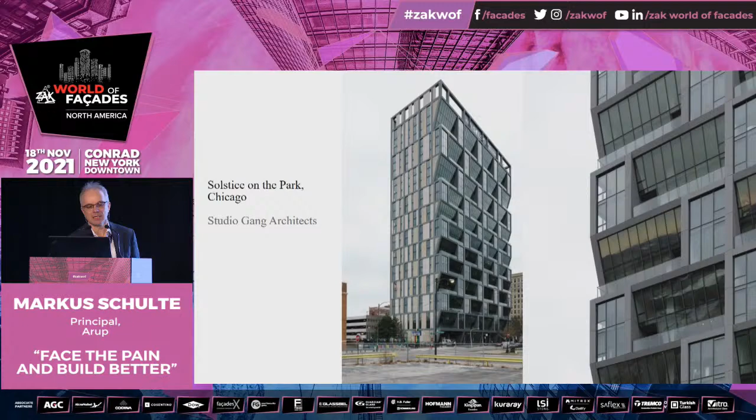When I came into this country, the project that was really important for me is this one here. And just to avoid any misunderstandings, it's obviously not an Arup project. As Attila knows, I studied at Leibniz University in Hanover, and I'm kind of a child and student of the School of German Lightweight Structural Engineers.

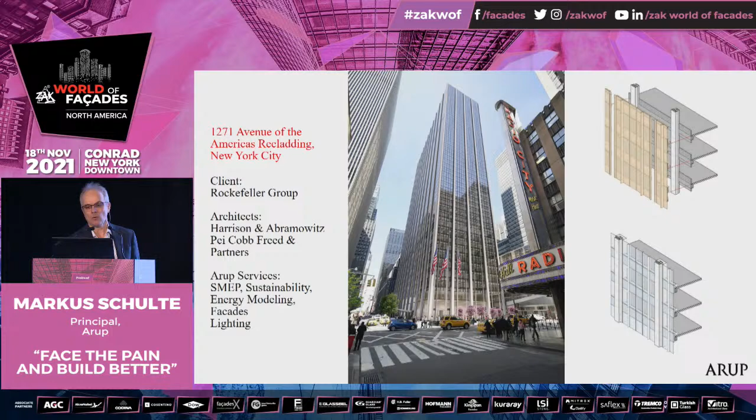We all worked on the project. We, Arup, provided a package of services. If one looks at the building, it's to some extent a celebration of efficiency.

It does not have the typical 30-foot column bay for an office building, and it's fairly narrow. In elevation, you see a very narrow vision field and a large spandrel panel. On the exterior, there are uninsulated risers going up and down the building. Looking into the spaces inside, this narrow vision field leads to very limited daylight penetration.

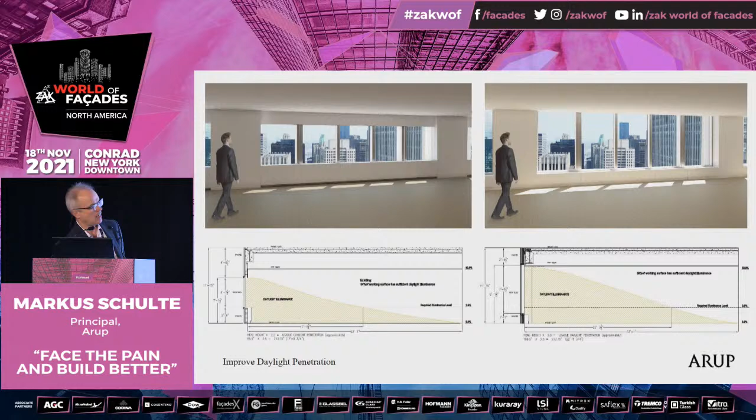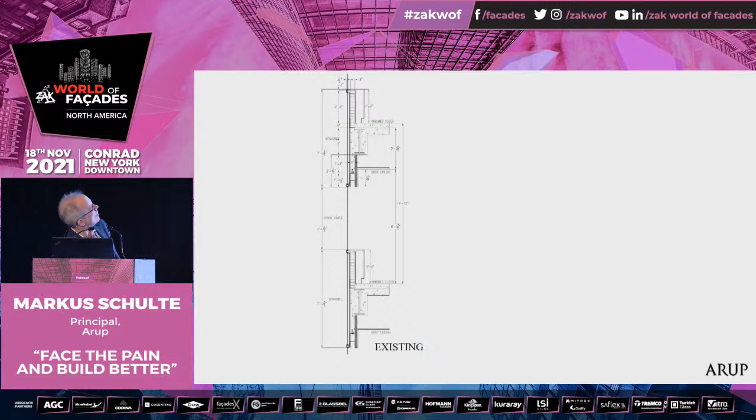So one goal of the new design is to improve daylight penetration into the building. If one wrestles with a building of this typology, looking at the existing condition, you recognize there is no insulation. There's a quarter-inch piece of glass for the vision area, and a quarter-inch piece of glass in the opacified spandrel areas. No insulation whatsoever.

So if one wants to improve it, what one needs to do is push out the building envelope, the exterior face of the glass, in this case a little bit more than 6 inches. So now we have an improved vision area, and an insulated spandrel area.

This pushing out of the facade triggers a zoning review, because the gross square footage on the lot increases, counted from the face of the facade. And one is only allowed to push the facade out and add this square footage to the lot if you meet certain specific thermal performance requirements.

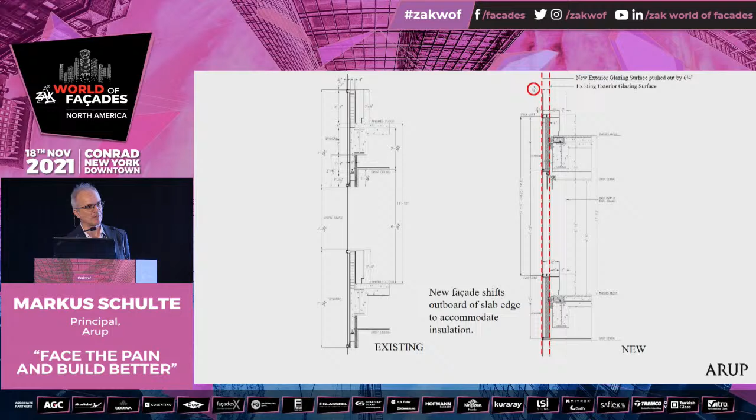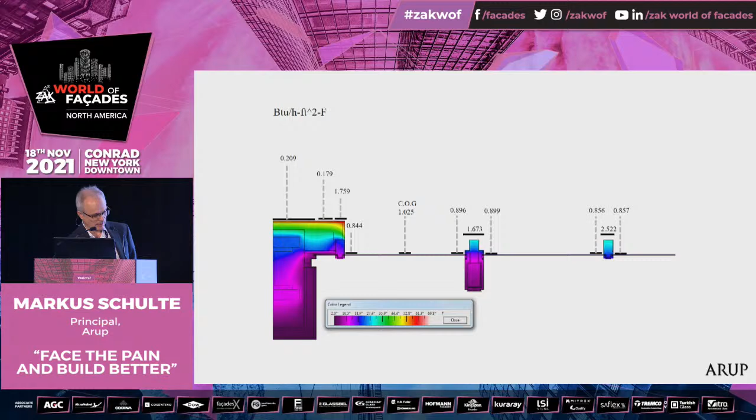To prove that we meet the thermal performance requirements stipulated by the zoning regulations, we first calculate the performance of the existing facade with a program called Therm—that's what we nerds do—and then we tabulate it. This is an interesting summary of the important thermal performance criteria on this building.

It's not only U value that is important—solar heat gain and air infiltration are equally important. In our current code discussions, with ICC's equation 4-2 being used as a backstop calculator, the solar heat gain and leakage criteria are completely left out. So there's a fetishization of U value happening right now, which I'm not necessarily a friend of, as you can gather from me talking.

The U factor improvement required per zoning regulation was 63%. We were only able to achieve 42%. But if you look at the other items, solar heat gain and air leakage, we obviously improved the performance of the building significantly.

So at the time, we did a whole building energy model. What you can see is that thermal performance improvement in U value, solar heat gain, and leakage is not linearly proportional to energy savings. The way we got this project approved is that, combining and looking at all the different items, we proved our facade is performing much better compared to if one would improve the baseline alone.

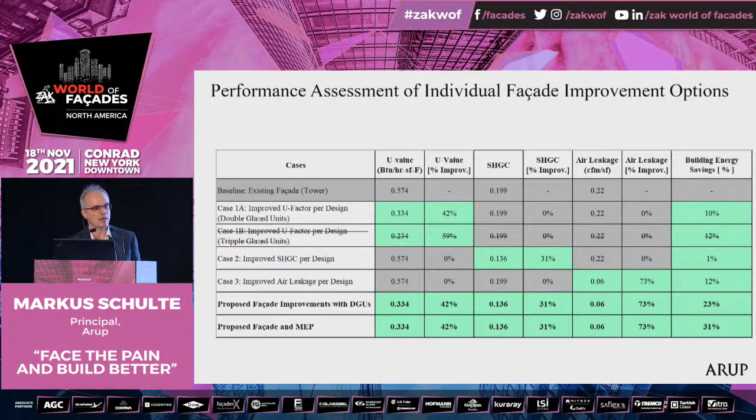The central mechanical plant on this project was upgraded a long time ago, and so these borderline buildings offer huge opportunities for us as designers, as engineers, to contribute to reduction in greenhouse gas emissions and to reduce global warming. You can see this is the summary of it.

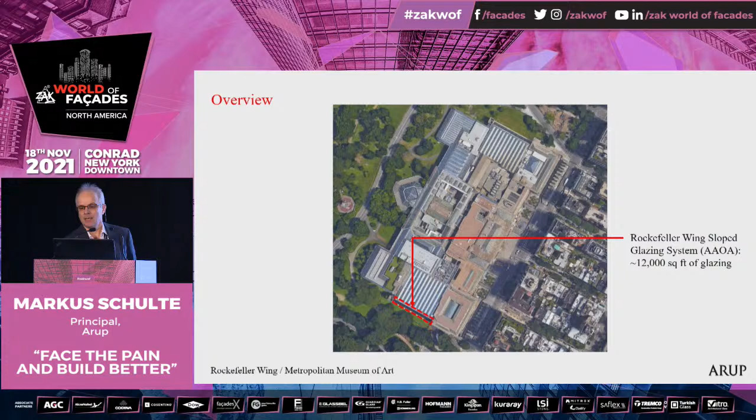It's the replacement of the sloped glazing on the southwestern side. The executive architects are Beyer Blinder Belle, and the exhibition architects are wHY. We, Arup, provide facade consulting and lighting design. Kohler Ronan are the mechanical engineers, and TT are the structural engineers on this project. You can see the gallery here on the western side.

If you look at the original Roche Dinkeloo drawings, you can see that this 4-story glass wall was implied to have a connection to the park, and then there was a little bit of opacity implied in the glass on the upper registers.

Obviously, for the institution, having a 4-story glass wall for the exhibition of very sensitive, conservation-sensitive artwork is not an easy proposition. So when the project opened, the shades were down immediately, and a solar control film was attached to the glass. You can see 40 years later, the institution has been wrestling with this wall for a long, long time.

The goals on this project—obviously the Met doesn't upgrade their building very often—and some of the goals shown here are potentially in direct conflict with what can technically be achieved. You're establishing visual sightlines by keeping sunlight and direct diffuse light out, and managing the quantity and quality of the light is a very schizophrenic proposition to begin with.

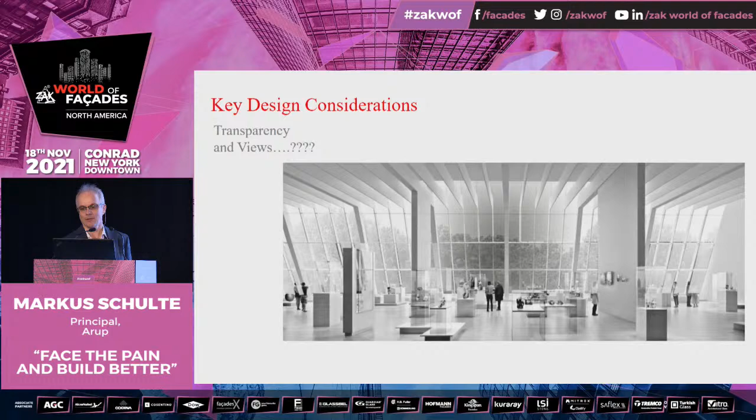You can see the client and designers very much focused on establishing this visual connection, potentially to the detriment of the artwork, where conservation of the pieces there have to follow very strict requirements. That does not only relate to the overall quantity of light, but obviously then the quality of the light as well.

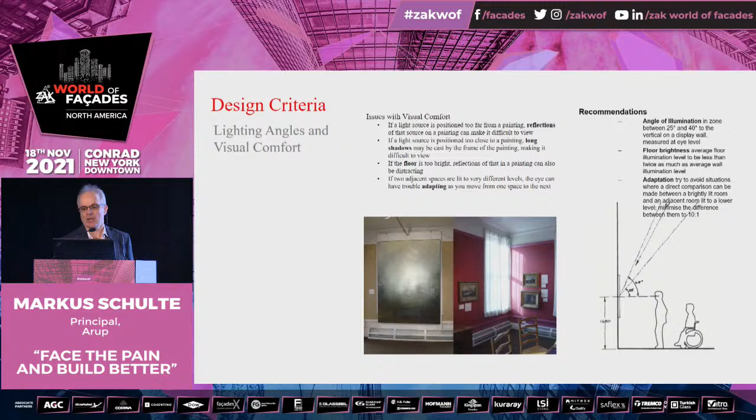In this case, UV, and then color temperature—getting that right, the support lighting of the electric lighting in the exhibitions, getting the color rendering right, getting angles and visual comfort for the patrons right. A lot of design criteria come into play to make this a successful space for the patrons of the museum, while at the same time protecting the artwork.

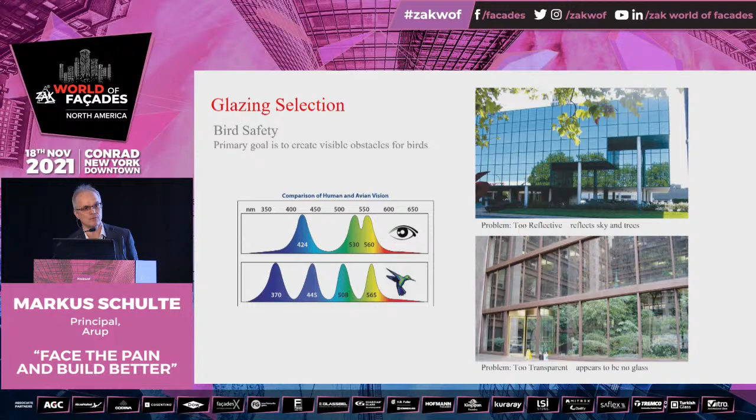And then obviously with some of the board members supporting the Audubon Society, Local Law 15 is very important and relevant for this project, right next to the park and the trees that it has as well.

So what do we do? As you can see, I'm standing here as an engineer, and if one is faced with a proposition like this, what one looks at—obviously the first step here—one looks at the light.

When you look at the project in plan, you notice it's following Manhattan's grid. It's shifted clockwise, and it beautifully faces the afternoon sun. So it harvests the sun to some extent—the polar opposite from a north light system, which is typically what you'd want in galleries to assure daylight requirements.

Here you can see that if you go along the winter, summer, and fall conditions, there's absolutely no shortage of light.

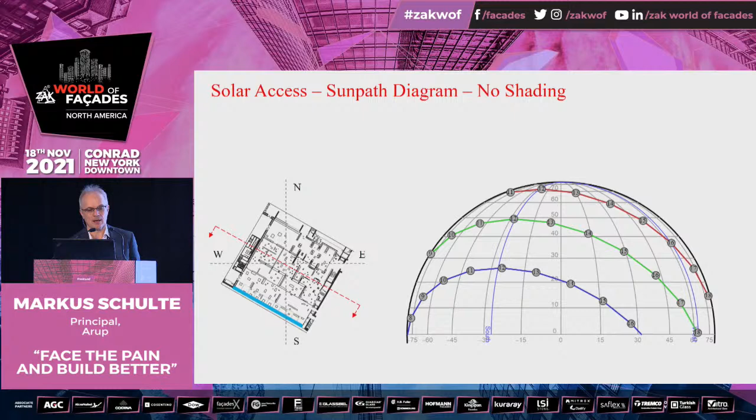In section, the upper red line is the summer solstice. You can see the sun peekaboos around the corner here—it goes down, it goes over, and then comes back at a very high sun angle. Then at the fall and spring conditions, it goes all the way over. And at the winter condition, the sun is very low, leading to potentially very deep penetration into the space underneath.

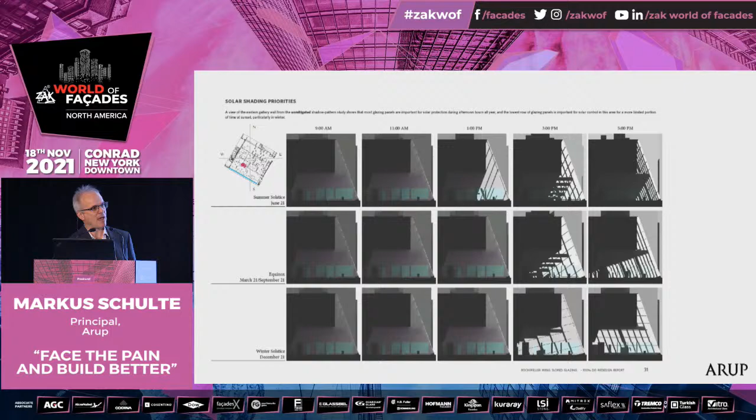Then what our lighting designers do is take the local solar climate and project it through the facade into the galleries, to arrive at a strategy to manage the overall quantity of light. So they build their lighting models and come up with a strategy to meet the amount of light in plan and to limit penetration into the space.

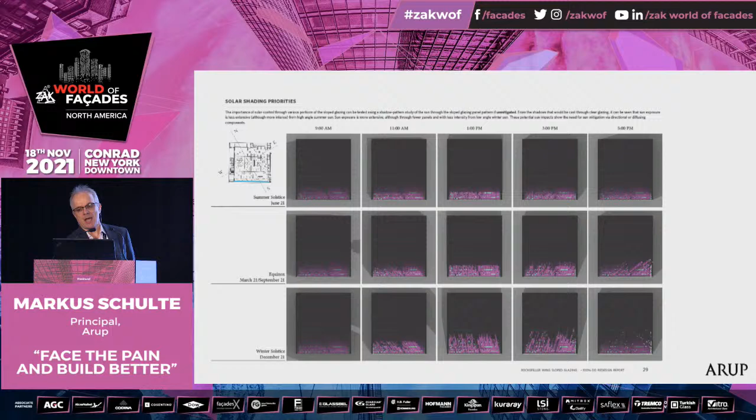What they do is look in plan at the artwork and define allowable lux hour levels that the artwork can experience. Then they modulate the VLT in the facade surface to arrive at the maximum allowable levels, which are these ones here.

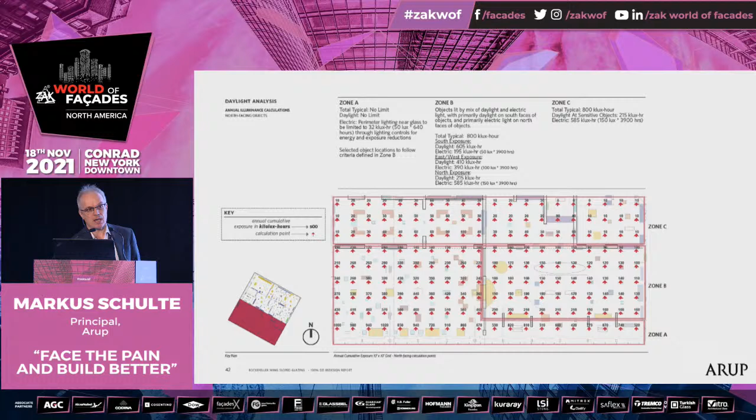In exposure and conservation of artwork, the most important criteria is the amount of lux hours of light it sees over a year. As facade consultants, we are tasked with this abstract plane of a facade - how do we materialize it to arrive at a system that meets the art conservation criteria that have been coordinated with the conservators of the museum?

Anybody who has worked on horizontal and vertical shading elements knows you apply shading elements, tilt them, make them bigger, and you reduce the exposure to direct light. At a point in time when you do this, you arrive at a situation where you really want to combine the horizontal and vertical shading elements to limit the amount.

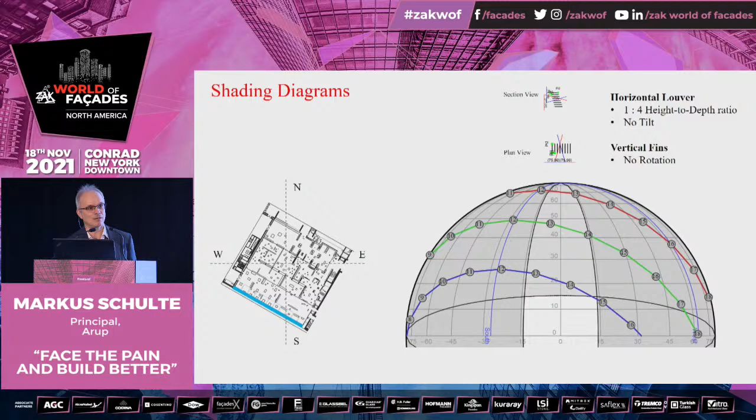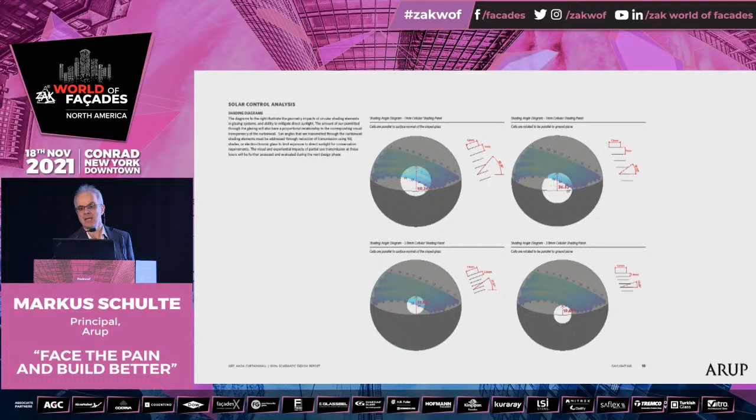Unfortunately on this project, the project is landmarked, and you can't just plaster horizontal and vertical shading elements in front of the Roche-Dinkeloo design. So it becomes very clear that if you want to create a combination of horizontal and vertical shading elements, one strategy that one could apply would be angular selective glazing.

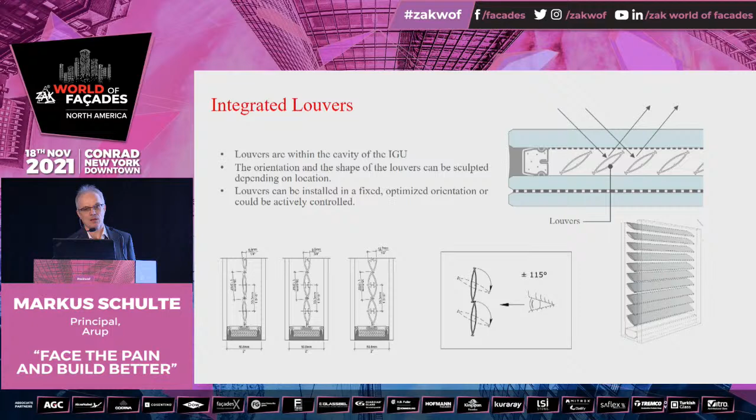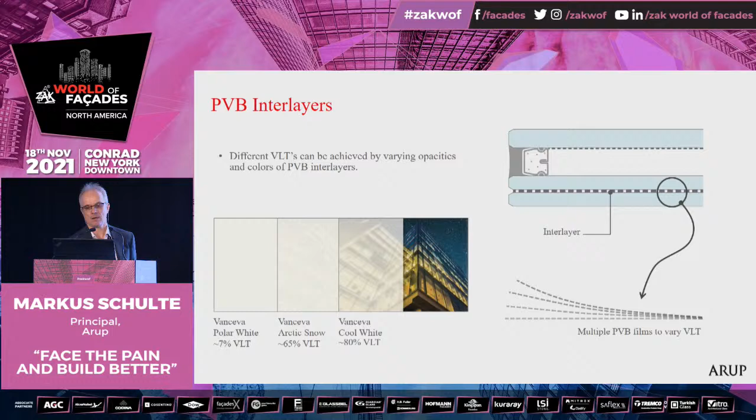These are the straws, the Okalux capillary, or the panelite systems. These can be used to manage the overall amount of light, and what it does is create a very distinct view. Obviously horizontal louvers alone, in this case integrated into the glass, wouldn't cut it, because as the sun goes around, ideally you would want the louver to go with it - and unfortunately we can't do that here due to the landmark requirements.

The other elements available to manage quantity of light, as you saw on the prior slide, are PVB interlayers, the Vanceva interlayers, and ceramic frit. The ceramic frit has the advantage that it helps in mitigating bird strikes, and Christine will be part of a later panel today - she has been fundamental in allowing us to mitigate bird strikes on this project.

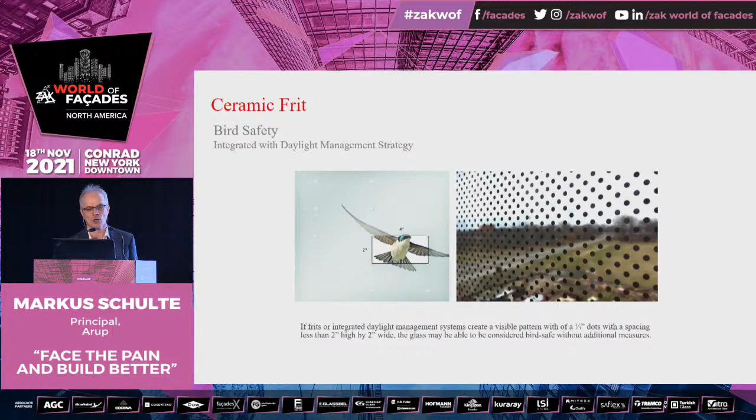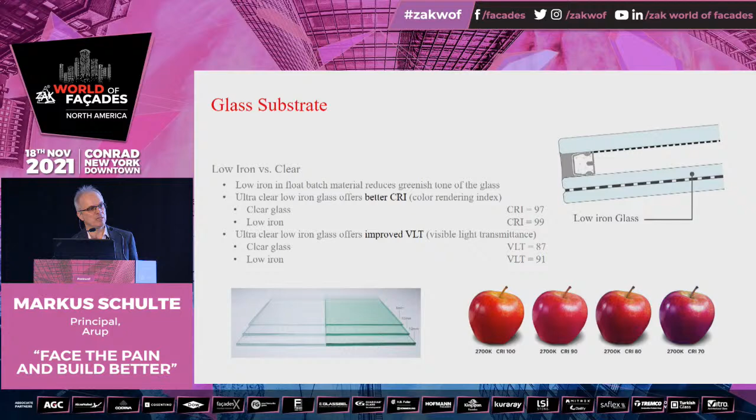Then the other elements that come into play is color rendering. So the colors of the frit, the color of the low-E coating, the color of the glass substrate has to be chosen such that it doesn't distort the color rendering and viewing experience of the artwork in the gallery. A lot of you are probably using low iron glass - that is key, but the color impact of the low-E coatings and the color impact of the frits is very important in equal fashion.

The last element that comes into play here is thermal performance. This project is different than 1271 - here triple glazing does make a significant difference. It's a four-story glass wall, and for the comfort and for the local loads in the space, triple glazing makes a tremendous difference. It not only helps with overall energy consumption, it helps with condensation mitigation. Museums and healthcare buildings are all humidified buildings driving at a fairly high dew point, in this case 50 or 55 degrees, and the center of glass U-value of a double glaze unit would not allow mitigation of condensation in the center of glass.

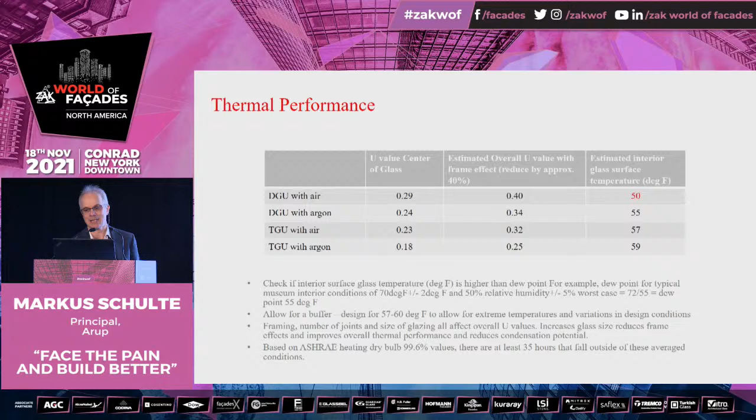Lo and behold, then considering framing effect, transom sills and head details - the other important item is obviously module size, and the number of joints one can have, the number of weak points, is very important. So here we arrived at a module size that picks the first transom above the plane of view, but it still creates a glass panel, a triple glazed unit that is not too heavy and too cumbersome for replacement in case a piece of glass breaks in the future.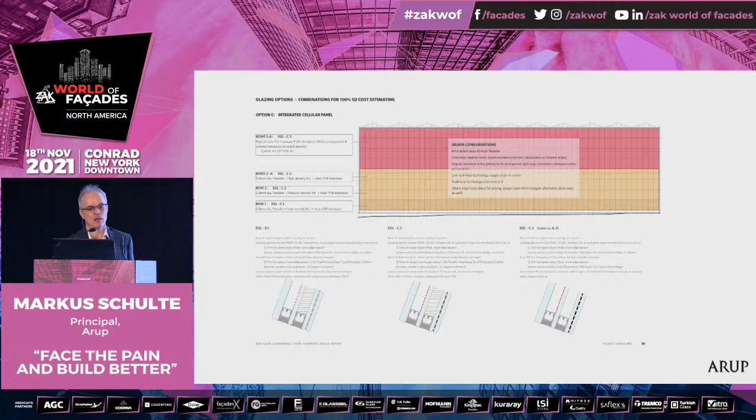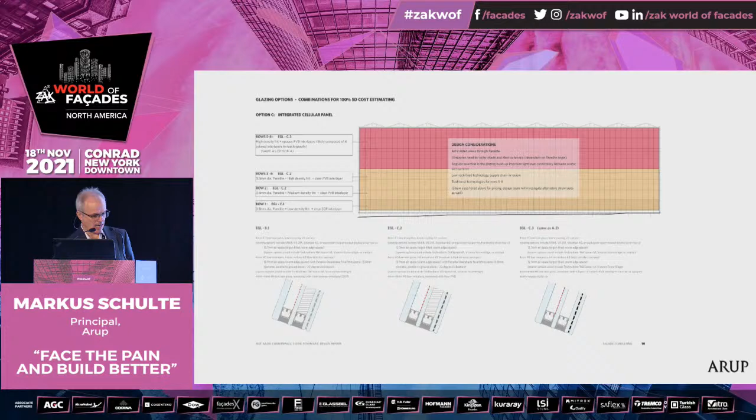So where does this all go? Obviously a lot of options one can have. This is an option that uses passive means for managing the quantity and quality of light - so Vanceva interlayer, ceramic frit, low-E coatings. Then the next one is an electrochromic option, and then the last one is the integrated cellular panel with very distinct angular visual capabilities.

All of these systems, in the context of system, can be applied in this case to a triple glazed stick-built cassette system. So the glass comes with aluminum channels, structurally siliconed to the underside, and then toggled to a stick-built aluminum system. What this creates is a system without pressure caps on the exterior that are prone to leakage and prone to the delta T deteriorating over time. So we just have a silicone face seal, then we ventilate the glazing units all around its edges, and this network of secondary ventilation is then drained to the exterior at the bottom.

And then, as an effort to have belt and suspenders for condensation, we have condensation gutters—a channelized system that collects any condensation that occurs on extreme nights and puts it into a reservoir at the base.

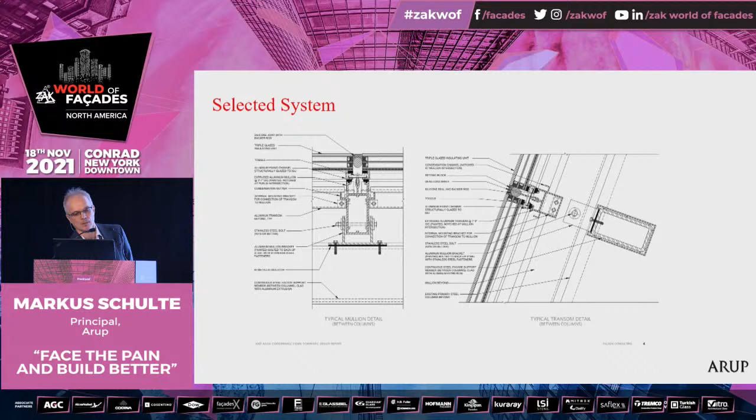The finally selected glass is a triple glaze unit, with a laminate on the exterior. You can see it's a 2-ply laminate, thicker on the exterior, which makes the unit bubble to the inside and appear visually really flat.

In row number 1, we have frit on surface number 1, and in rows 2 through 8, we have frit on surface number 2. Both of these have a low-E coating.

Trösch is the glazing fabricator here. It's a 3221 combi silver coating, which works a little differently. Typically one wants to maximize the ratio of VLT to solar heat gain, but here it's almost the opposite—we want to bring the VLT down while retaining color rendering. So this coating cuts out a lot of light but still maintains the neutrality of the glass, so the overall color rendering stays high.

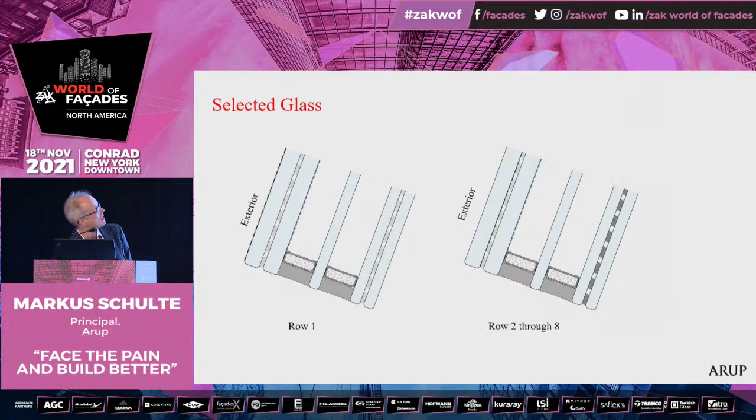Then we have a simple fully tempered light in the middle and a regular PVB on the inner laminate. For rows 2 through 8, we have Vanceva interlayers combined with a gradient frit that manages the overall amount of light the spaces experience.

This is where we are right now. We built the daylight model and have been measuring the amount of light we have and the quality of the light we experience. So far, everything looks really good, and it meets the predictions.

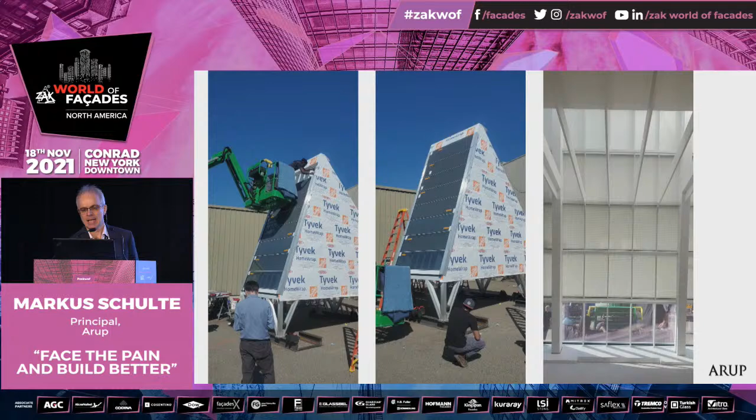So we correlate what our computer models have been predicting with the actual mock-ups built at Caden in New Jersey, hopefully leading to a situation where the new galleries allow a view to the park while meeting the strict conservation requirements stipulated by the museum.

Coming back to my initial point—the other approach to projects, my team's approach, is that we don't try to impose ideas and designs on top of projects. We look at the health of the project first: what does the project tell us if it could speak to us, if we analyze it, how would it look? I think that's what we as technicians can contribute to this discussion—designing projects that perform better, where design narratives actually have content and don't require post-design engineering justification. With that, I pass it on. Thank you so much.

Markus—I apologize, calling you Dirk. It's one of those things that comes with age; you start renaming people in a very persistent manner to keep your life simple.

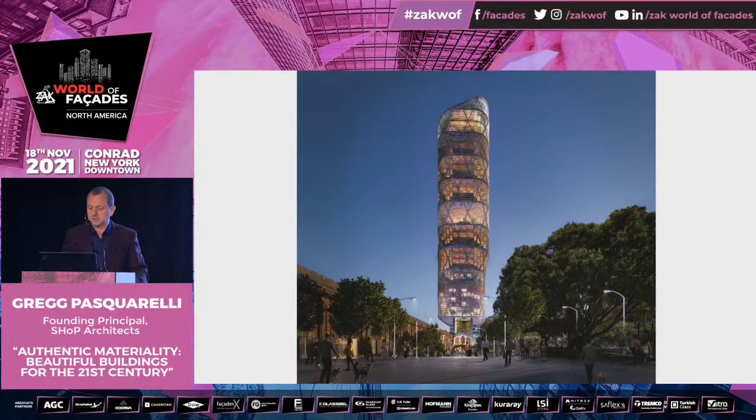Or some of our new projects: this will be the tallest hybrid timber and concrete tower in the world in Sydney, Australia, the new U.S. Embassy in Bangkok, a new tower in Rotterdam, and the new consulate in Milan, all with this kind of exploration of materiality and texture and connection with history that we think are incredibly important.

But today I'm going to talk about 3 projects, 2 of which are here in New York and 1 in San Francisco, starting with 9 DeKalb.

These were all projects where the facade was really incredible and integral to not only the way the building is read and understood and performs, but also in getting the entitlements for the building. So it was a key driver for the project.

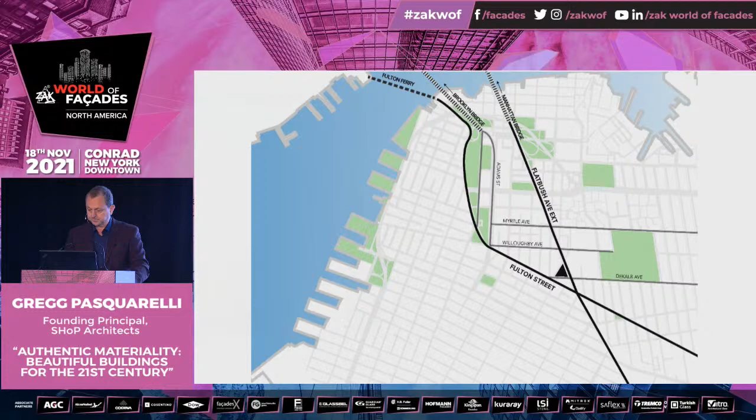This building was a really tricky project. It's at a triangular site at the corner of DeKalb and Flatbush next to Fulton Street in downtown Brooklyn. We had a landmark bank taking up 2/3 of the site, and this was a building that was both an exterior and an interior landmark, which was a magnificent space.

We were challenged with deploying 800,000 square feet on top of a site with a very small footprint to land the building. We looked at some of the details. It was the Dime Savings Bank, with these incredible mercury dimes, and the capitals are fantastic.

The original architects really had beautiful use of materiality and color that we used as a kind of driver for thinking about the project itself. Then we looked at how the original architects dealt with the triangular site using a series of six-sided stars and hexagons in order to deal with that geometry and position the building in its site.

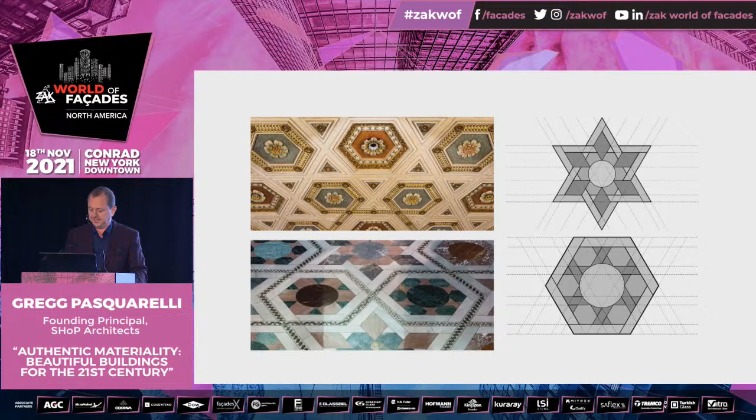So the dark blue line is the exterior landmark, the light blue line is the interior landmark, and then we just had that small area to drop the building. We could have, as of right, built a very large, tall slab building that would have blocked the landmark from the main Flatbush Avenue address.

What we decided to do was take that triangulation and drag it across the site, and then ask for permission to demolish the back part of the landmark building, leaving the interior portion of the landmark alone, but then create a series of interlocking hexagons to deploy the FAR into the tower itself.

Now, when you're building in Manhattan, you've got the avenues as the primary streets and the streets as the secondary, and so there's always a kind of positioning of the building and the way it sits.

By building what we knew was going to be the tallest building in downtown Brooklyn and also the first supertall building outside of Manhattan, and the only site zoned to allow a building of this height, we knew that the building would stand alone on the skyline and would be viewed from all the grids in Brooklyn, which are actually not aligned—they're all different grids because they were built at different times.

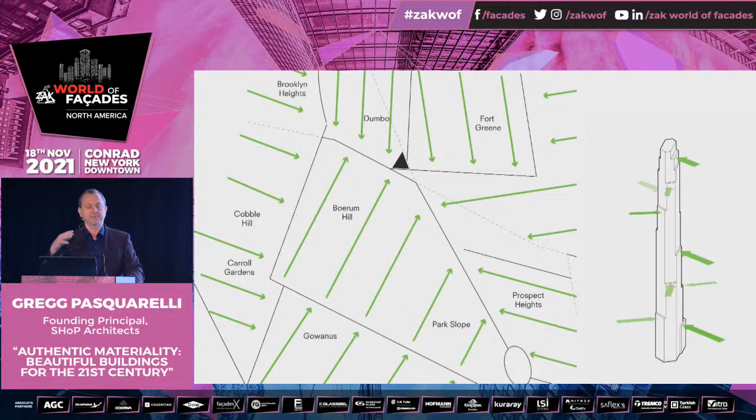So the goal was that no matter where you saw this building from a distance down these one-point perspective avenues, we wanted to make it feel like you were looking at the front of the building. So we did the series of setbacks in a kind of spiral.

We started doing some research on this notion of fluting, both in nature, in historic architecture, and what an idea of contemporary fluting would be.

We used a series of colors drawn from the bank, everything from a kind of black stainless steel, anodized aluminum, a bronze alloy, and a baked enamel.

We extracted literally thousands of different shapes from the historic bank, and we made these boxes and began to assemble all these different combinations of extruded tubes that were abstractions taken from the bank in the different colors.

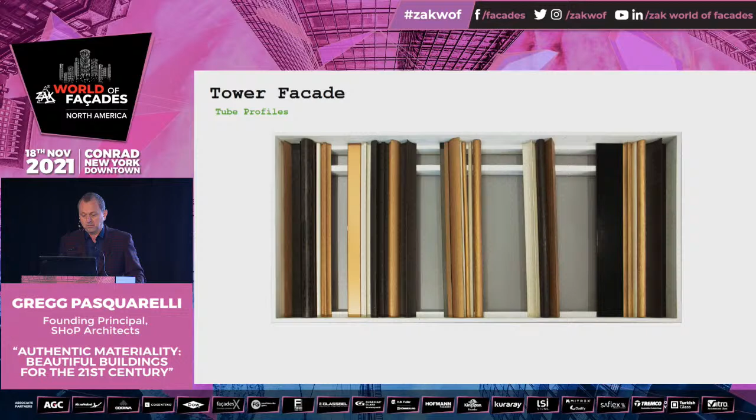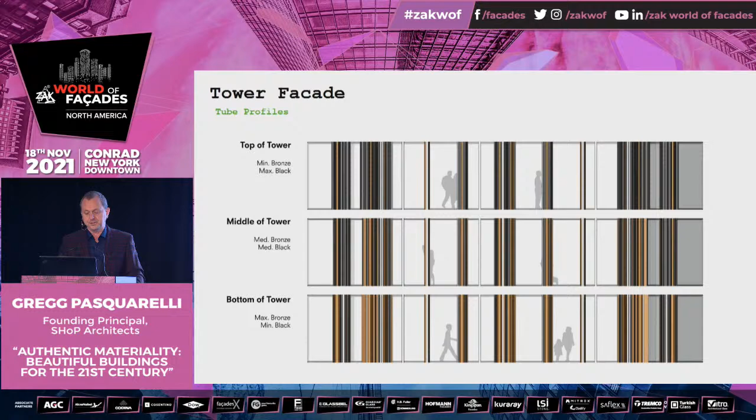We took a light, dragged it across it, we photographed it, we saw the kinds of patterns and systems that we thought were interesting, and that became the kind of texture on the facade itself. It changed from lighter as you were lower in the building to darker as you went higher in the building.

And then these were some of the models where we were working on the interior of the building and the exterior of the building, moving the inside to the facade and switching it around. You can see our very high-tech binder clips at the top, keeping them in place.

I think what we were trying to do with the hexagon and with the texture was that the most interesting thing about a hexagon building is that you're always looking at two facades in the oblique. While this was mostly a residential building and needed a lot of glass, we wanted a building that had a certain solidity, something that earned its position on the skyline and felt like this kind of landmark or lighthouse. By having this incredible texture on the facade and looking at it in the oblique, it would turn those two facades solid even though they were glass. That was really the driver behind the design of the building.

So here's the model. You could see the building as it went up, and then we had to finish out the rest of the base that connected to the landmark bank. We had about 3/4 of the site. The one corner is the bottom left. Some of you who know Brooklyn very well, that's Junior's Cheesecake area. I really wanted to knock Junior's down, but I think I would have gotten in a lot of trouble with a lot of people from New York.

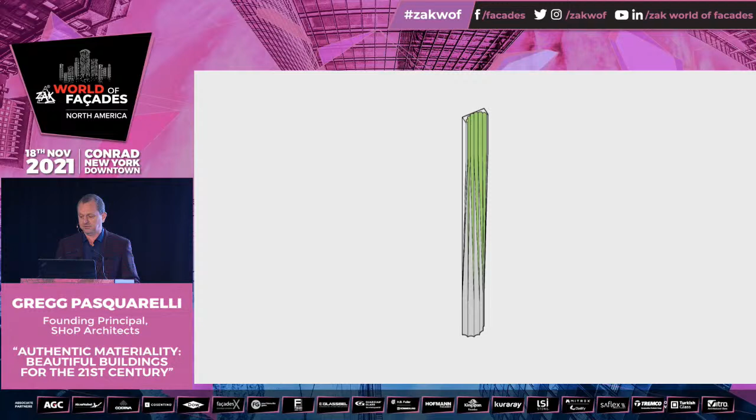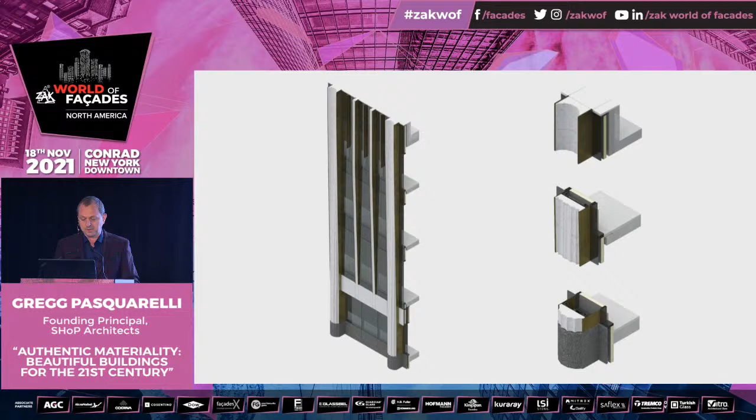So here you can see the details where it goes from convex to concave, how it turns the corner at the main entrance where you see the building as you're coming down Flatbush Avenue off of the Manhattan Bridge. And then it's all bracketed by these bronze elements that go together on top of this black marble base at the bottom.

So here you can see the view as you come down the road. Here you are on the entrance on Flatbush Avenue. And then we took the roof of the landmark building and created the amenity space for the residents themselves, and centered the pools around the landmark dome. It was a complete restoration of the historic building.

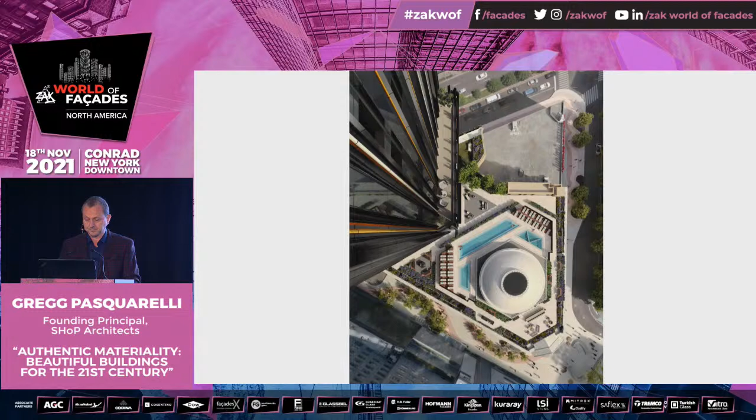We created a second entrance by preserving the facade of the landmark building on Fleet Street around the back. And then you could see the demolition of the back of the landmark building, but leaving the interior landmark, which you could see as part of that hexagon on the right, digging out next to the subway system, and then pinning the landmark wall as it wrapped around, setting up the space for the tower to be built.

And so we really loved this idea of the way in which the building would be viewed from Albee Square, which is a great pedestrian square, and then what the building would look like when it was done as the first and only super tall tower outside of Manhattan.

And so here you could see as the facade panels arrived, they're kind of this almost oddly both modern and Baroque facade at the same time. It was really important to us to hold solidity at the corner and create these patterns of light and materiality as it turns.

And the building is under construction. We topped out the superstructure about 2 weeks ago. You can see the facades going up. You can see the solidity when you look at the facade along the oblique. You can see the reflection—it's a super dark glass. We were really interested in this building that sat opposite the landmark below.

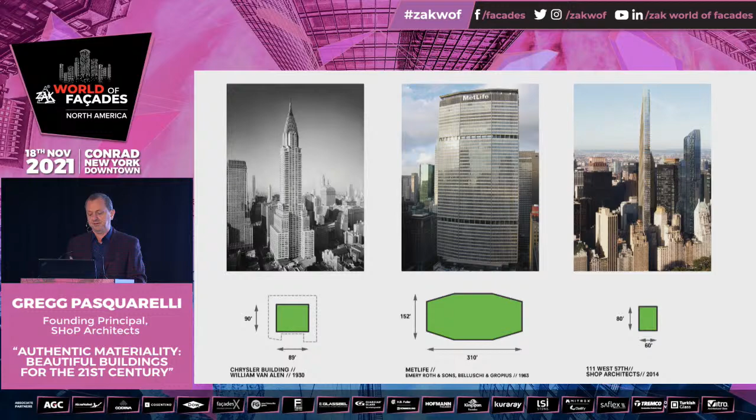Now, our building was really remarkable in the sense that the floor plate was only 60 by 80, which sounded incredibly small, one apartment per floor. Remarkable, but when you look at the Chrysler Building, it's only 90 by 90, though no one really thinks of it as being that small. Obviously, incredibly different than a typical post-war building of 150 by 300.

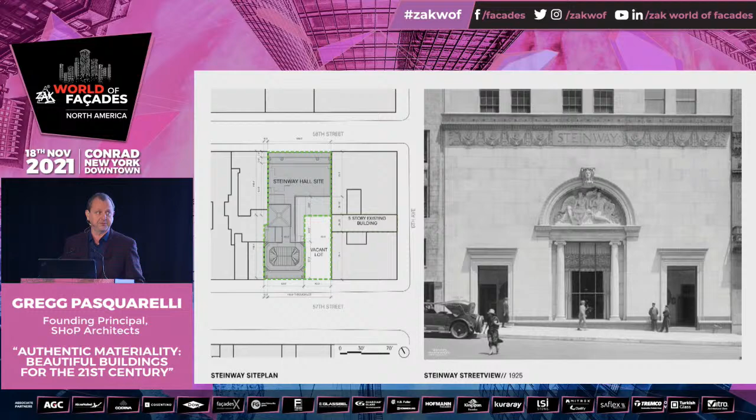We also had a landmark to deal with here, Steinway Hall, a Warren and Wetmore project built in 1925, where for basically a century Steinway pianos were sold. Really a pretty fantastic building, an L shape that was wider on 58th Street than on 57th, with a vacant lot next to it that our client bought. So our client bought the vacant lot, they bought Steinway Hall, and they bought all the available air rights left on the block. For those older New Yorkers, you'll remember the Ritz Thrift Shop used to sit on that site, which had great commercials a long time ago.

This was both an exterior landmark, and we proposed to make it an interior landmark as well, by landmarking and restoring the existing building, which was in pretty bad shape by this time. We could have put all of the FAR on the vacant lot, which would have obliterated the top of the Steinway building, which we thought was pretty magnificent.

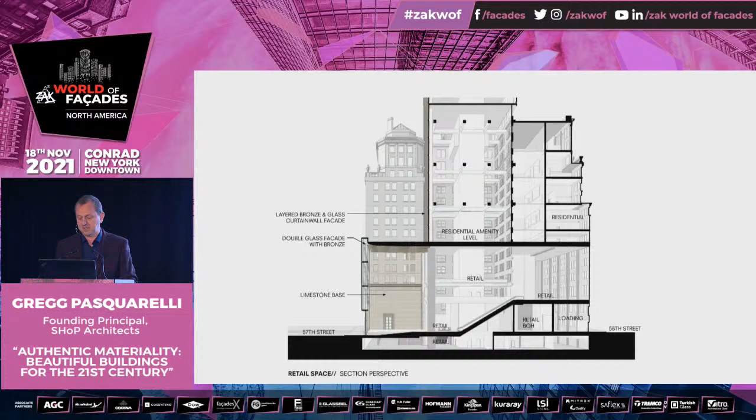So what we proposed to do was to build the tower on top of the landmark, but shift it back and around and celebrate the Warren and Wetmore building itself. We had to build 65 feet high on 57th Street. We created this retail podium, there was an amenity level, and we took every other floor out of the Steinway building to raise the ceiling heights for the residential units below, then started the tower above the Steinway portion, which reaches up to 1,428 feet.

So here you could see the facade as it comes down for the retail podium. We brought some of the elements of the facade down to the street because I thought it was really important that people could touch them, and then deployed that building at 60 feet wide by 1,428 feet tall.

For those of you who know slender buildings, any building with an aspect ratio of more than 1 to 10 is considered slender. Anything more than 1 to 15 is considered exotically slender. The most slender buildings in the world are about 1 to 18, mostly in Hong Kong. This building is 1 to 23 and a half. A really remarkable structural engineering feat that WSP designed.

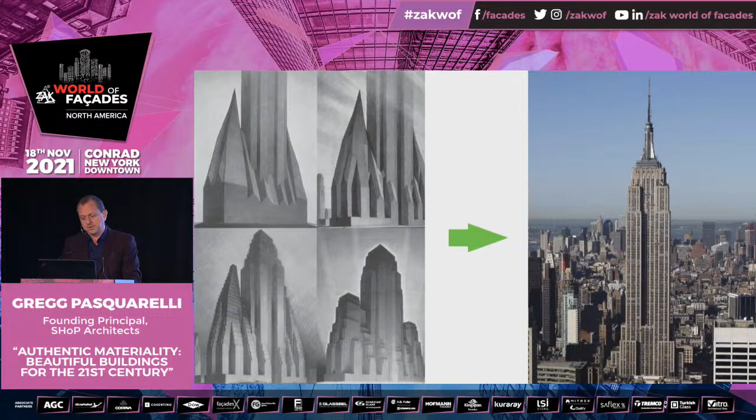And you could see we fully restored the landmark Steinway building and then nestled the tower as it came down. And then when we were thinking about the design of the building, we were really looking again at the notion of the setback, and could we rethink the concept of the setback.

The traditional setback is on the left. The way many people deal with it today is kind of rotating the sky exposure plane back. We said, was there a way to do both of those at the same time? So it was this notion of the feathered setback, that there would be multiple small setbacks that followed the sky exposure plane, to be a both-and condition of a traditional New York skyscraper and a modern one at the same time.

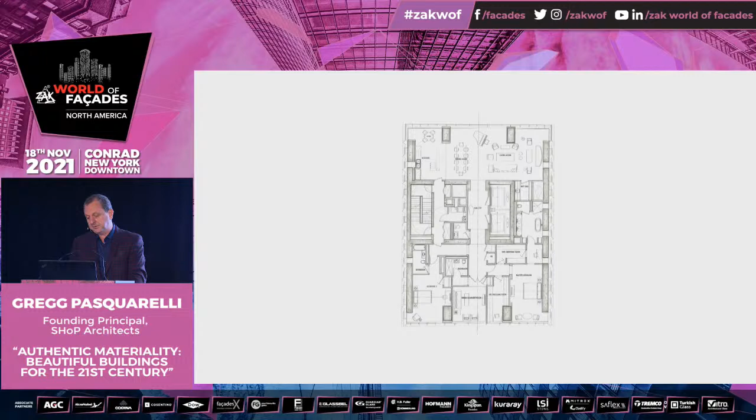Every floor has its own single apartment. We loaded the structure in the east and west facade and opened it up to the north, to the park, and to the south, to the city. We put the living towards the park and the sleeping towards the city. So it's a single apartment per floor with elevators that open right into it.

And when we started to think about the facade, we were thinking again about this idea of something that looked at history but really pushed it forward from a technological perspective. It was that notion of texture and materiality that led us to a terracotta facade.

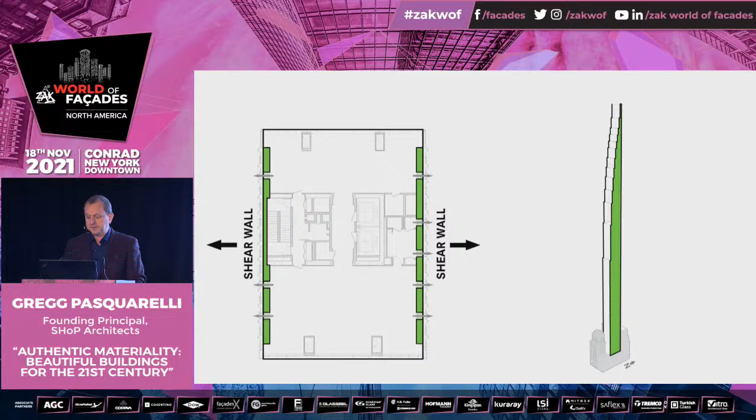We had these monster shear walls, basically 5 feet thick by 70 feet long. The structure is basically an I-beam in concrete with small punched windows in the east and west. But instead of having a super blank wall, we said, what if we were able to create a kind of texture on the pilasters, each pilaster ending in a setback itself? And if we could do that, when the sun hits the building from the south and you're walking on 57th Street seeing that side facade, it would create this shadow and light moire pattern on the facade of the building itself.

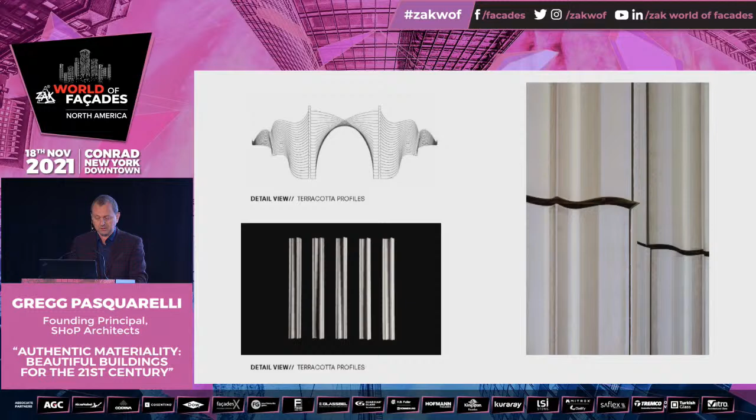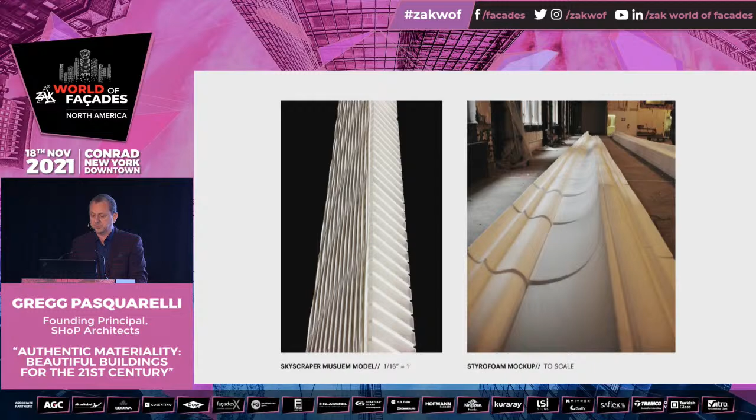So the profiles are 26 different shapes that when they're installed rotate back and forth, and there are 6 different colors of cream, which creates 42,800 panels of terracotta. Here you can see some of the studies, some of the full-scale mock-ups, and then the extruded pieces made by NBK out of Germany.

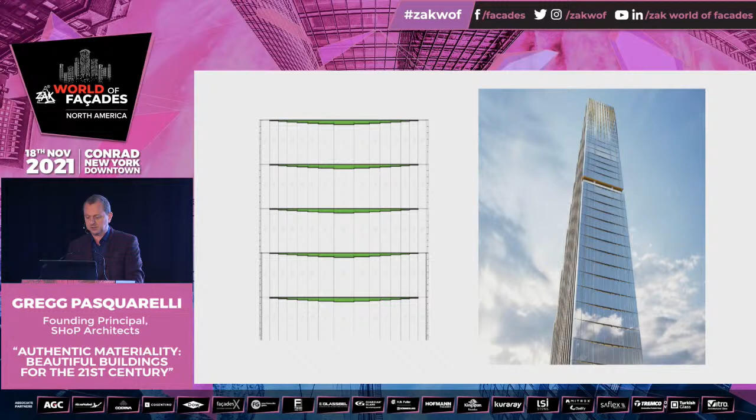The north part of the facade, facing the park, was mostly glass. We did these inset bronze elements that change in their dimension along with the change in the glazing panel size as it moves towards the middle, to almost give it a sense of curvature. Each apartment has a 60-foot living room facing directly onto Central Park. No, this is not an affordable housing project.

And then maybe my favorite part of this entire building is that we made custom door handles which are the building itself, that we cast at P.E. Guerin down in the West Village. And therefore, every time you open or close the door, the building itself is in your hand.

The facade was also a generator for some of the duplex apartments, and this is the way the buildings are delivered. We reused the curb cuts and the loading docks from Steinway Piano to create an interior porte cochere along 58th Street.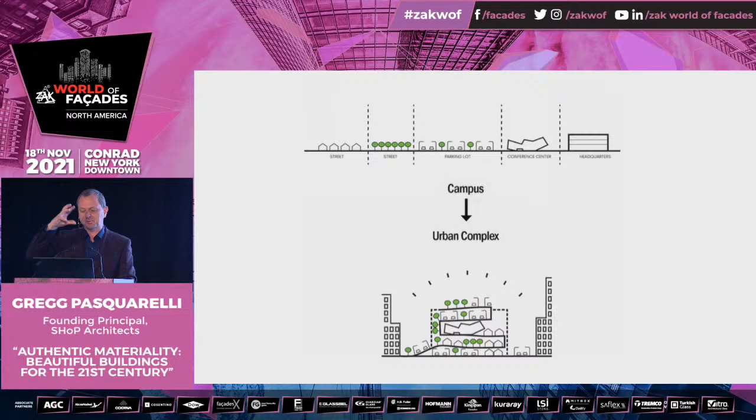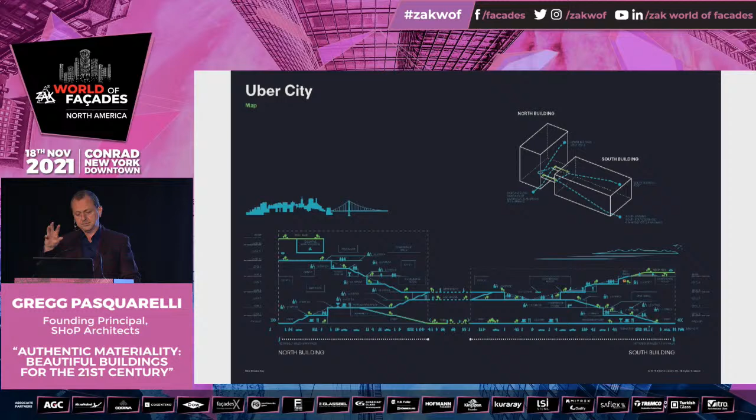And so it's been this idea that we've been working on about sort of folding the campus into an urban vertical campus. And again, looking at San Francisco and the verticality of San Francisco, the idea of the building was to figure out a way that you could put all the collaboration spaces, not deployed all over the building, but focus them into the 2 facades, the south and west facades, and to make it all connected by stairs, and to be able to get to anywhere in the 2 buildings within 6 minutes of walking.

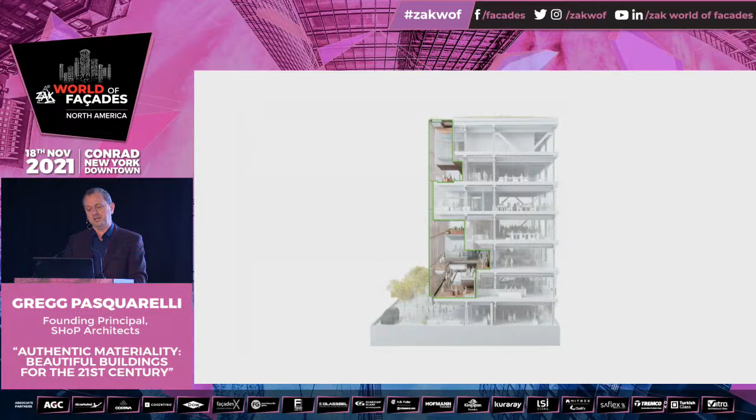And the idea was that the building—this is a sort of typical section—that the front third of the building would be all the collaboration spaces and would not be air conditioned, that it would be outside. And that the back two-thirds of the building would be air conditioned, and that's where the programming happens, but all the collaboration happens in this front porch.

And so the facade really went through a lot of issues about how we can make it as clear as possible so that you could see in.

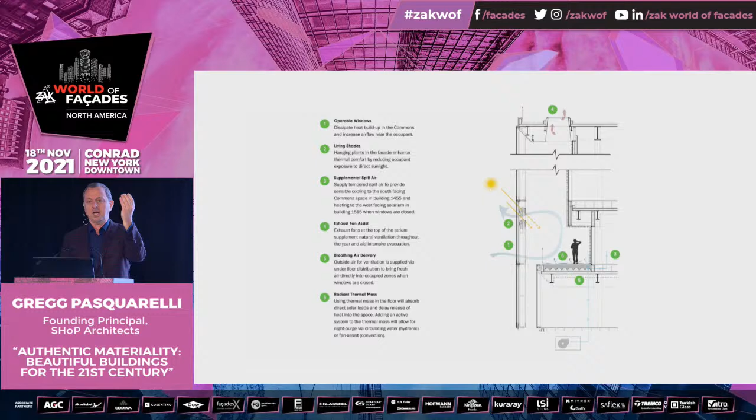The CEO of Uber talked to us about how everyone thinks of our company by looking at their blank screen. We want a headquarters where they can see inside, where they can understand and see what's going on, and that the collaboration of the people who work here actually occupies the facade itself, so that the vertical campus, the quads, are in the thickness of the facade of the building.

So here were some of the concept images of what that might look like, of what we call the front porch or the commons. And now the building, they are just moving into it now, so here you can see it as it was finishing construction.

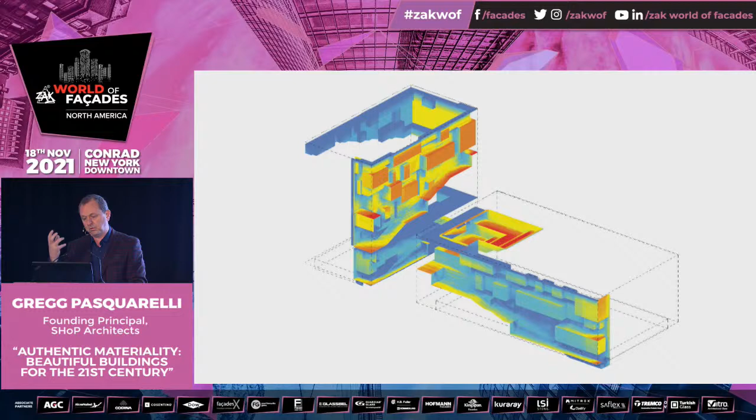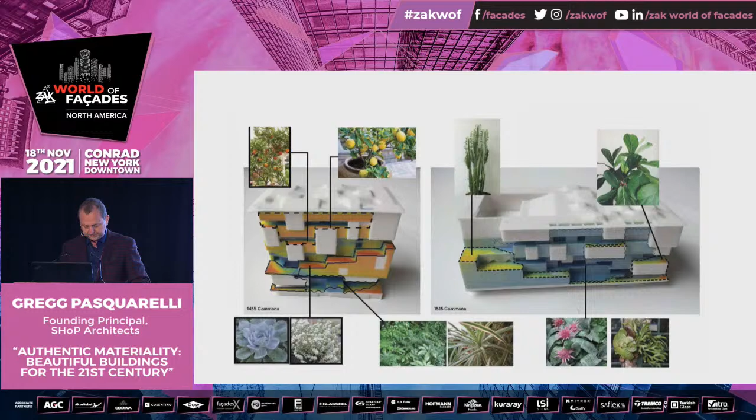Obviously it was really driven, and the whole design was driven around a sort of thermal and environmental performance. There's a huge amount of biophilia built into the facade itself, which is a pretty incredible thing. So here you can see, to create shading, it's a fully integrated irrigation system that helps create thermal comfort and shading, and works on the moisture in that front open facade.

And here you can see in the commons what this looks like. The interior facade really is more like a curtain wall, but there's all this natural ventilation coming in, and so there's a wood screen that helps protect it from the outside. It reflects white out and black in to cut the glare on the screens.

And then here you can see some of our other performance analysis, and what the building looked like in and of itself. And I think the most interesting thing about the building is that wherever the facade wraps around the commons, you have a series of bifold facade elements.

So these are 10 feet wide by 14.5 feet tall. There are 180 of them, and based on sensors and what's happening in the common space, they automatically open and close and let the building breathe to control the temperature, the wind, and the environment. So you literally have a living, breathing facade that opens and closes the building.

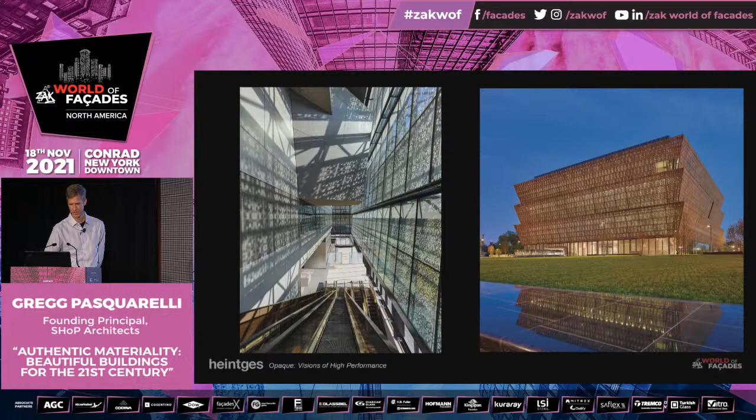I think, as Gregg's presentation brought in quite nicely, this keys right into it. There's been a lot more interest from architects and from owners in the opacity of facades, and I think there's a reason for this. There are lots of good reasons. One is architecturally it's very interesting, right? But there's also an energy reason for this.

So just to set the context, step back for a moment, want to think about where buildings are in our energy spectrum in the world. This is the International Energy Agency from the UN, documenting that about 36% of energy use in the world comes from buildings. So 30% of that is actually in the operations of buildings, and 6% from the construction, so that's the embodied carbon content.

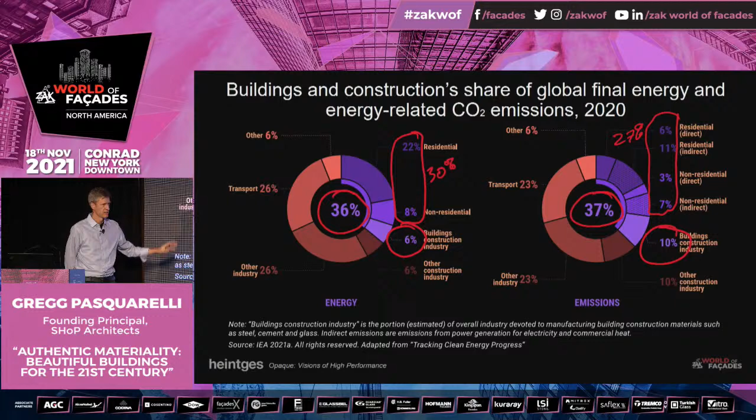That leads to about 37% of emissions, and 10% of the carbon output is from the actual construction, where 27% is use. So think about that - there's a lot of existing buildings out there, but the more that we can build efficient buildings, the better we're going to be doing.

The International Energy Agency, again, has a nice idea of how this could happen. So working from 2020 towards 2050, what we really need to do is lots of things, of which energy efficiency for buildings is a big part. Electrification - huge, probably even bigger than what we can do in the building industry. But from our side, we're looking at energy efficiency.

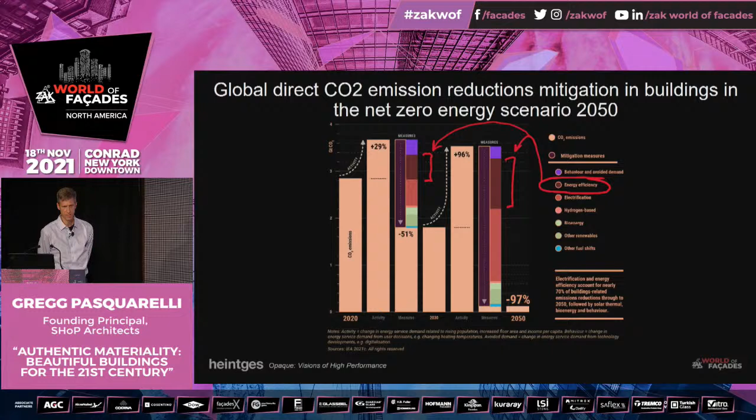So where does that happen? How does that happen collectively? I think this is where it's really important that we embrace the changes of building codes that are coming our way as architects, designers, contractors. I think all of us have the initial reaction of 'something's new out there, this is tough.' But actually what it's doing is driving collective action. This is something that's set up, really - there's a very interesting history of where international building code came from, starting in the 1990s, working through, and we're seeing the benefits of that program now.

You can see here where we have developed countries with energy codes, we're actually reducing the energy intensity of buildings. And this is very important because we're building more buildings every year too, so the more efficiency, critical.

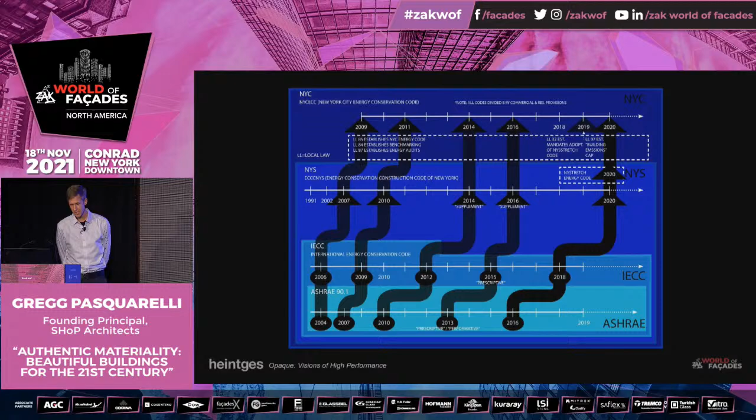Just thinking about New York as a microcosm of this effort going on around the world, you can see from 2009 when we adopted the IECC codes here in New York to 2020, how we stepped along with ASHRAE's performance from 2004 to 2016. So each new building code required more stringent metrics.

And still, here we baseline it with 1975, so we're about 50% of the energy intensity use of a building now that's code compliant, simply code compliant, than we were in 1975. So this is great - we're pushing this collective action just by being code compliant. Nicely in New York, we have stretch code, so it actually pushes us a little bit further past that.

And today I want to talk about one further program, Zone Green, which I think, Markus, you were alluding to in one of your projects as well, that really brought it one step further. So aspects of these codes is that it's going to improve overall performance. One of the main ways is opaque areas. So this is a Studio Gang project we worked on in San Francisco with a window wall unitized system.

Here's another one where the choice of material was terracotta on a unitized curtain wall. Again, thinking about how architects are focusing on the materiality of the opaque areas and how that's becoming a real expression of the building. Or with Ramsa, Bob Stern's office, including stone panels on a super tall in the middle of Manhattan. Challenging architectural exercises, but again, the character of these buildings is really coming from the stonework.

Zone Green, a zoning initiative. There's a screenshot you guys can use to go find the zoning code. It's an interesting initiative that's pushing further thermal performance, especially thermal performance. The key here is owners and developers can get an extra 8 inches of FAR discounted from the thickness of the facade if they hit a couple of targets.

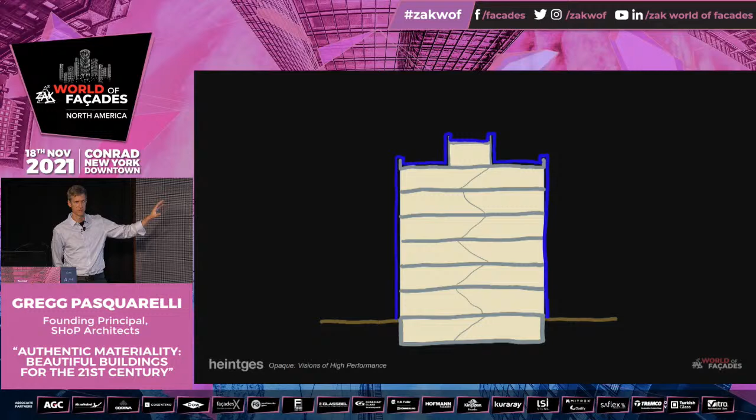This is pushing us toward a paradigm where we think of building envelopes like this: we have an interior and we want to create this shell on the outside. The mechanical engineer's dream, what they're asking us to do every day, is to create a thermal envelope such that nothing gets in from the outside and nothing gets out from the inside. They want to control all the intakes and exits of energy through the building. They're going to create the controlled environment.

We protect them from the sun. They exhaust heat energy from the inside when it gets too hot. I believe in it when this works. But this is a big question for the building industry that we have to keep working on, making sure we're accurately modeling our buildings to make the right choices here.

So the beauty of Zone Green is that building owners get extra floor area - that's the incentive program we're looking at. But let's talk about some numbers, just what that means for the facade.

At the top in gray, you can see our typical vision-spandrel code-compliant building would have U-factors of 0.36 and 0.061, current code. A high performance - and these words get thrown around, high performance, ultra high performance, whatever it may be - in 2015 that would have been a 0.35, just a little bit better than what code asks, and a spandrel of 0.25, so about a factor of 5 times worse. You can see that we fail the ratio to code.

Generally that was taken up by mechanical systems - the mechanical systems had more ability to meet this, so you could meet energy code with these numbers.

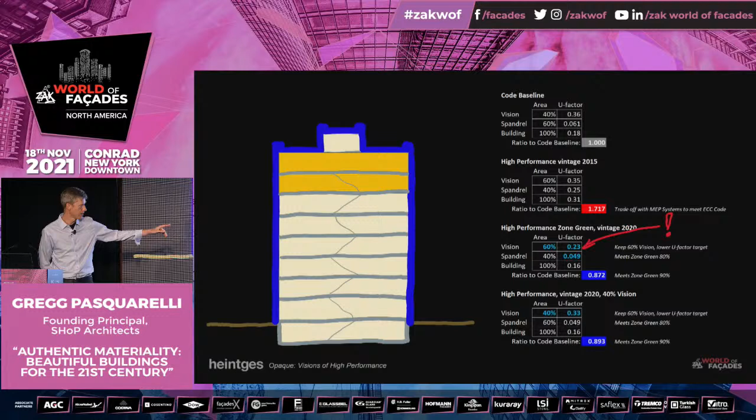High performance now, Zone Green vintage 2020 - projects we're working on are aiming for numbers like 0.23 for the vision area. This means triple glazing and very, very good frame values. The opaque area prescriptively has to be at 0.049, which in the worst case - and we don't recommend this, we don't do this - would mean just putting insulation on the inside of your facade. In the best case, you design a system that works, and I want to show you what that would be. What it also means is that you're going to have less window and more opaque area, which is why the opaque area is becoming so important.

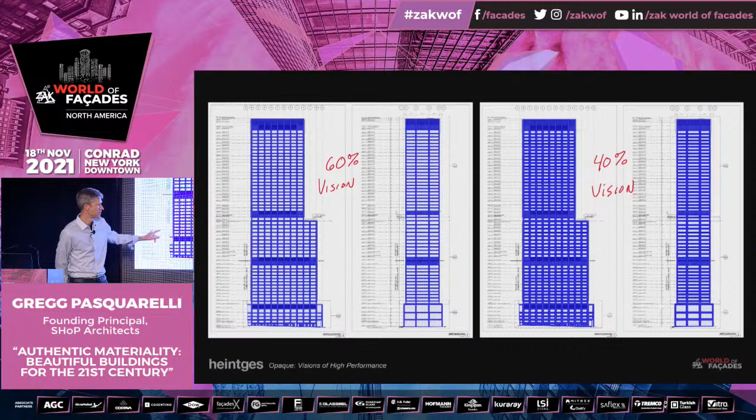This is just an example of what a 60% vision glass building might look like - white is vision, blue is opaque area. If you scale it down, you get the building next door with much more blue. That's really why, architecturally, the opaque area is becoming so important for architects to control.

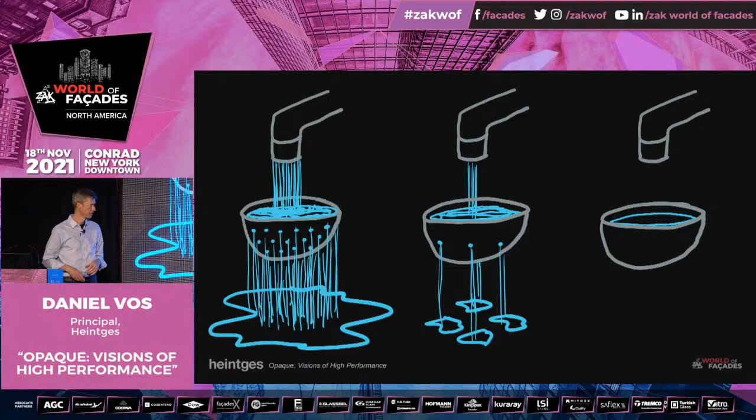Think with me about what thermal performance really means. Heat pressure inside a building wants to get out in the cold winter. An analogy for that would be a bowl of water - if you put a lot of holes in it, that's your leaky, poorly thermal performing building from pre-2000s. That means you need to input a lot of heat energy at the same time - your faucet of heat is running into the building. I think we got to that bowl in the middle by 2015.